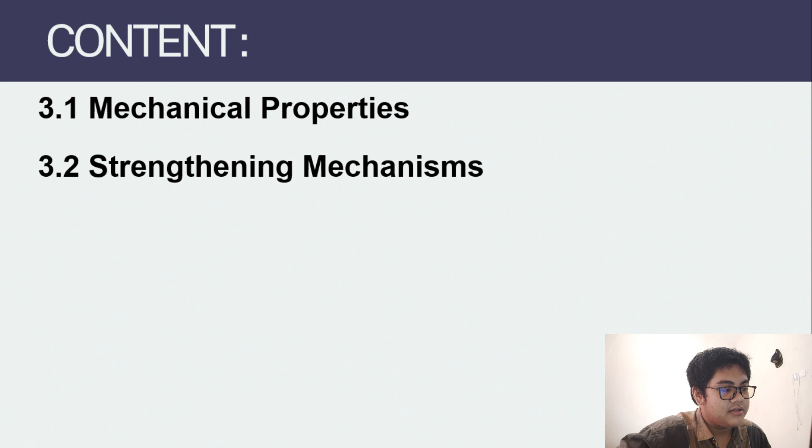Let's jump on the first one. We got mechanical properties. Mechanical properties is when a force or a combination of forces are applied to a material. The material responds by deforming or straining, often in a complex manner. For example, when a bungee jumper hops off a platform, the bungee cord stretches dramatically, and at the same time its cross-sectional area decreases. Under normal circumstances, the bungee cord safely prevents the jumper from hitting the ground below.

This example describes a type of deformation that is readily visible. Often deformation of this type cannot be observed this easily, but it does still take place. For example, a weight hung from the end of a steel wire will cause the wire to stretch and its cross-sectional area to decrease. But the amount of deformation is not readily observed without performing careful measurement of the length and diameter of the wire loaded.

Mechanical properties describe the relationship between the stresses acting on a material and the resulting deformation the material undergoes as a result of these applied stresses. The concept of stress in its most general form is force or load divided by the area over which it acts.

Different types of tests with applied force can be employed to measure other mechanical properties as well. Additional examples of such properties include the elastic modulus, hardness, fatigue resistance, and fracture toughness. These are described subsequently in more detail, as we can see in my presentation. We got hardness, elasticity, ultimate strength, fatigue, impact toughness, fracture toughness, high temperature resistance, damping properties, and wear resistance properties. Some typical room temperature mechanical properties of selected metals are listed in table 3.1.

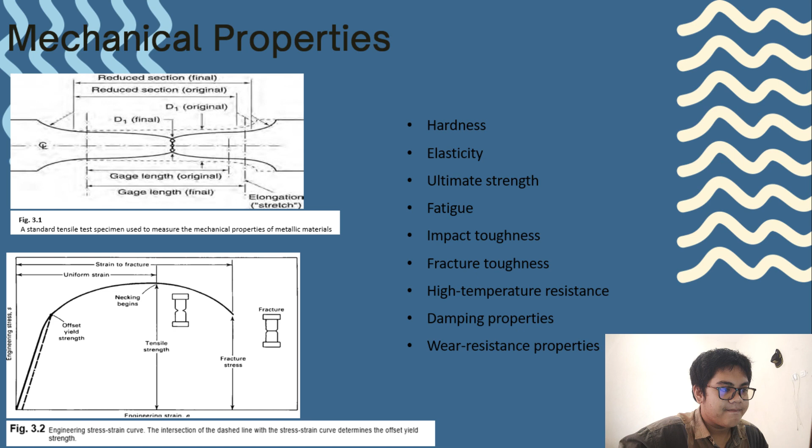This law of proportionality is called Hooke's law, after Robert Hooke. The linear relationship between applied stress and elastic strain results in a physical property called the modulus of elasticity of the material. The modulus obtained under axial tension or compression loading is called Young's modulus, and it's represented by E. I get the table also, the table where we can see some typical room temperature mechanical properties.

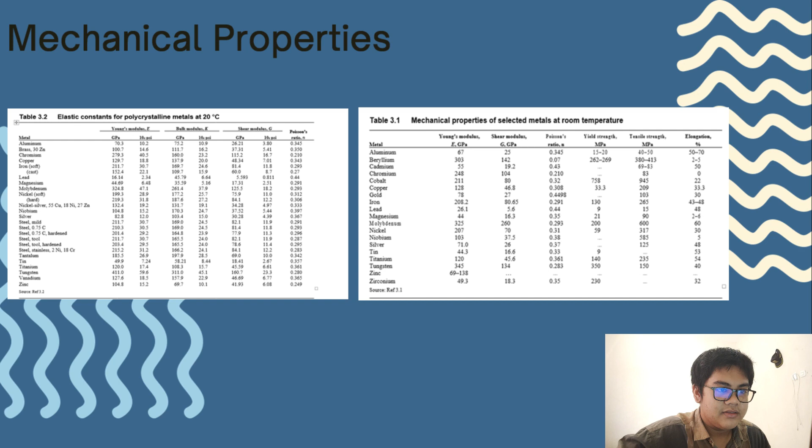It's the plasticity. The point at which plastic deformation or yielding is observed to begin depends on the sensitivity of the strain measurement. With most materials, there is a gradual transition from elastic to plastic behavior, and the point at which plastic deformation begins is difficult to define with precision. In tests of materials under axial loading, 3 criteria for the initiation of yielding have been used: the elastic limit, the proportional limit, and the yield strength.

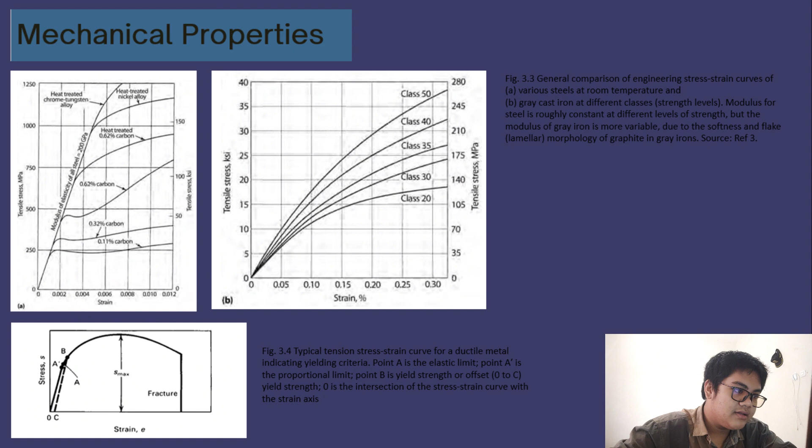And on figure 3.4, we can see a typical tension stress strain curve for a ductile metal indicating yielding criteria. Point A is the elastic limit, is the proportional limit. Point B is yield strength or offset. 0 to C, yield strength. 0 is the intersection of the stress strain curve with the strain axis. The strain from point A to B and s max can cause a fracture. Okay.

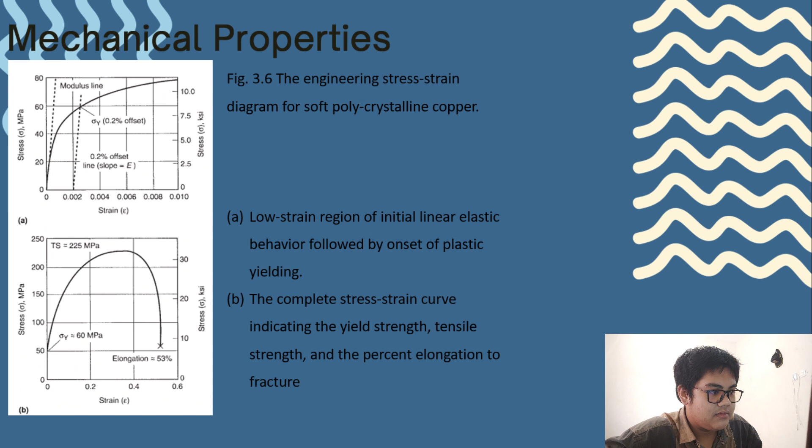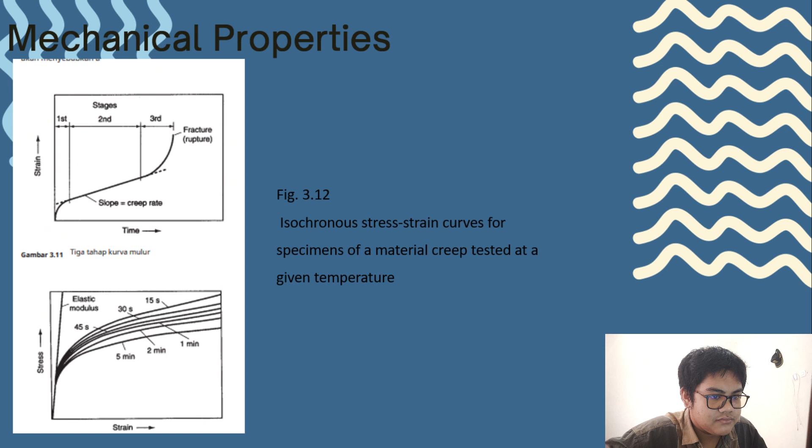Most parts and fatigue specimens contain points of stress concentration, such as surface roughness or a change in a part or specimen section at which stress is concentrated and where fatigue cracking initiates. The amount of concentration can be determined based on purely elastic behavior and is reported as the theoretical stress concentration factor or simply the stress concentration.

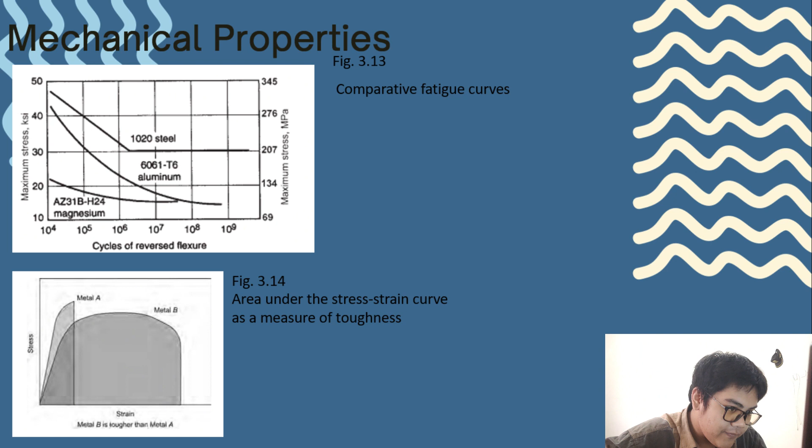As we can see, the amount of ductility is also related to toughness of a material. For the static or low strain rate situation, toughness can be determined from the result of a tensile stress strain test. It's related to the area under the stress strain curve up to the point of fracture, figure 3.14. As we can see, metal B is tougher than metal A. Area under the stress strain curve as a measure of toughness.

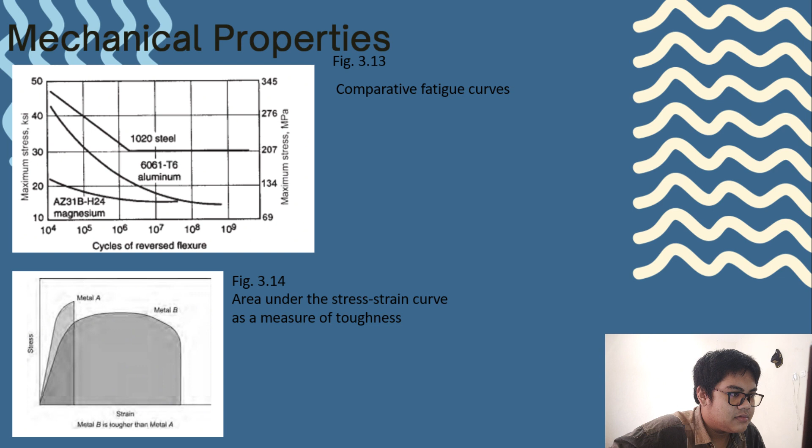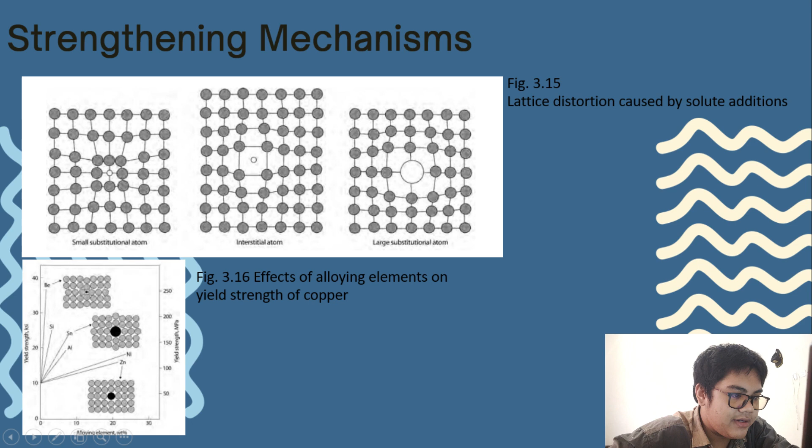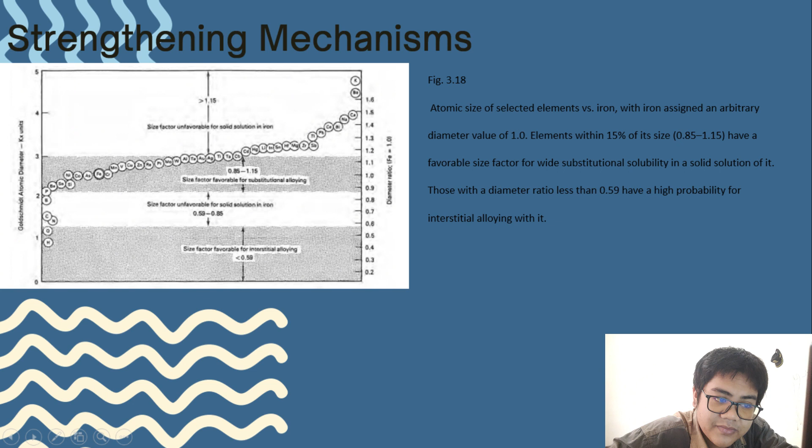And next we got figure 3.18, atomic size of selected elements versus iron, with iron assigned an arbitrary diameter value of 1.0. Elements within 15% of its size, from 0.85 to 1.15, have a favorable size factor for substitutional solubility in a solid solution of iron; those with a diameter of less than 0.59 have a high probability for interstitial alloying with iron.